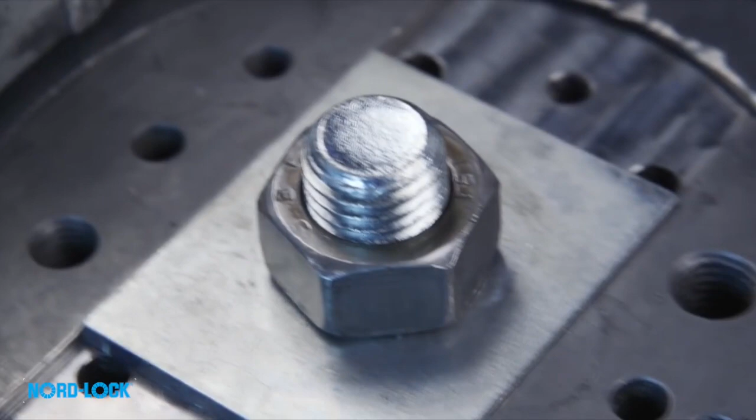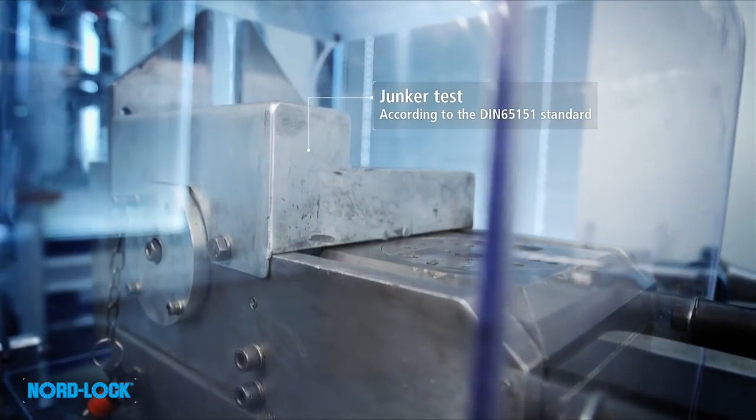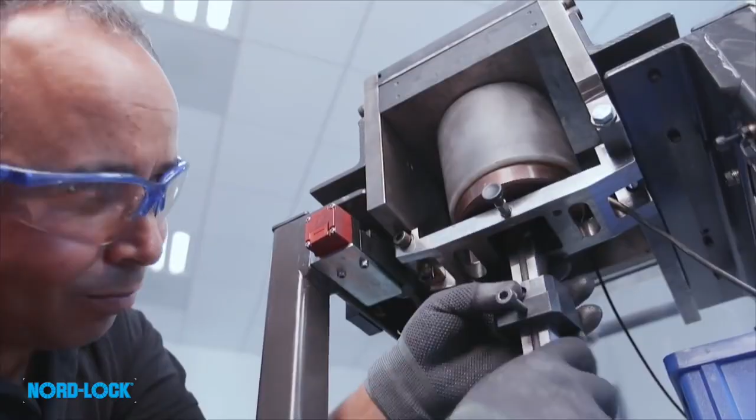Because vibration is everywhere, and vibration can loosen bolted joints. The Junker test is the most severe vibration test for bolted joints, used to compare how different locking methods behave under transverse vibrations underneath the bolt head, while continuously measuring the clamp load. Clamp load is vital, because when lost, the bolt is unable to withstand the working load.

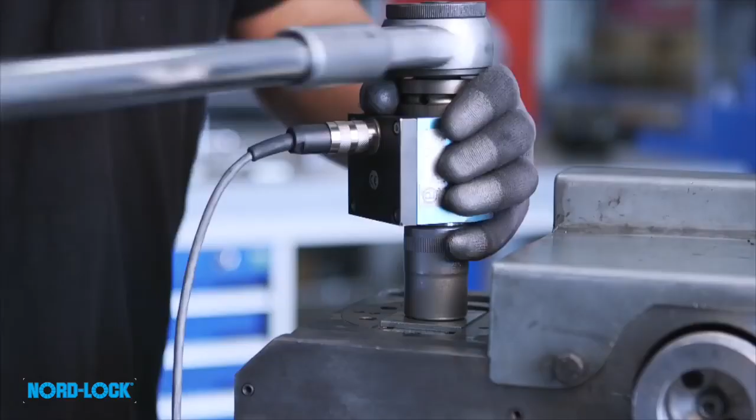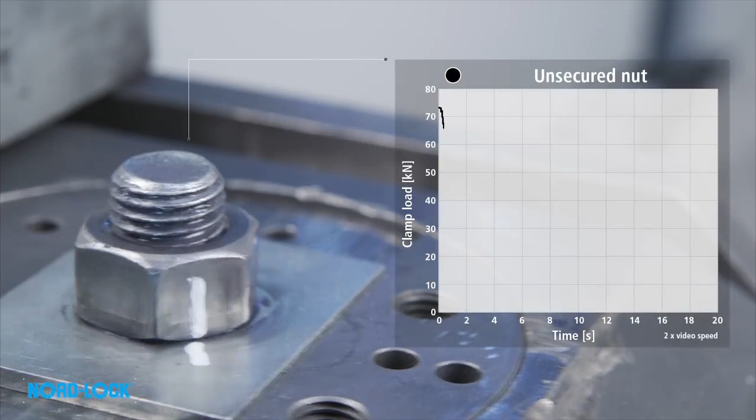We lubricate and assemble an unsecured bolt of size M16. We mark it to easily detect any rotation, and then run a test for 20 seconds. The nut starts to loosen, and the graph shows clearly how the tension drops dramatically within seconds when running the test.

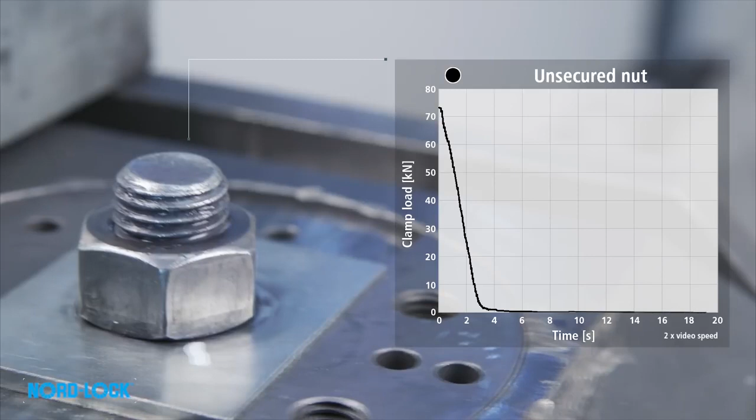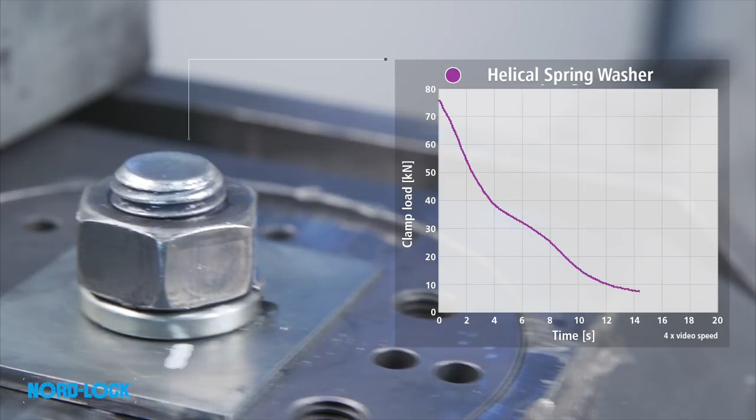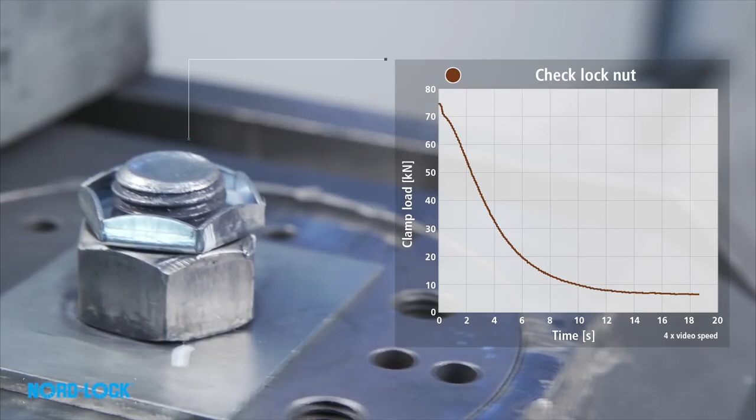We then expose a plain washer. A spring washer. A check lock nut. A nylon insert nut. And a double nut.

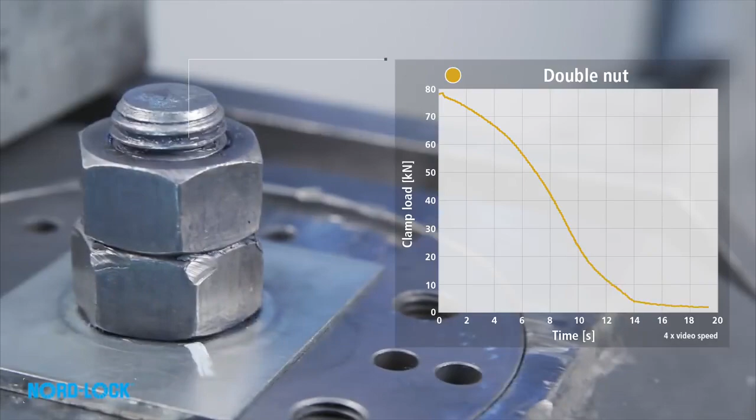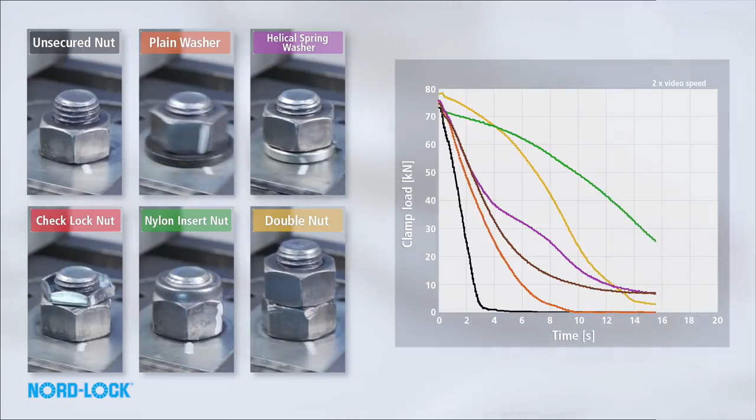All these solutions have in common that they rely on friction to secure the bolted joint. As friction is not a reliable locking method, the bolts will need to be retightened at regular intervals to prevent costly downtime or, potentially, an accident.

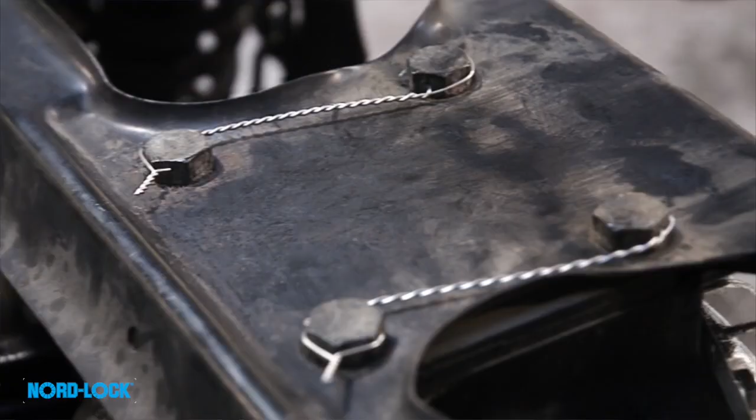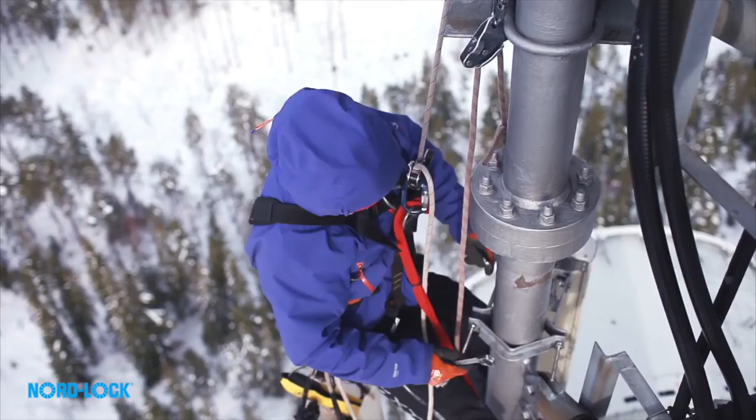Other common solutions, such as tab washer, locking wire and adhesives, are seen as safe. However, repetitive tests show that their performance can vary significantly in maintaining clamp load. These solutions depend heavily on the operator. They often require special tooling, and they are time-consuming.

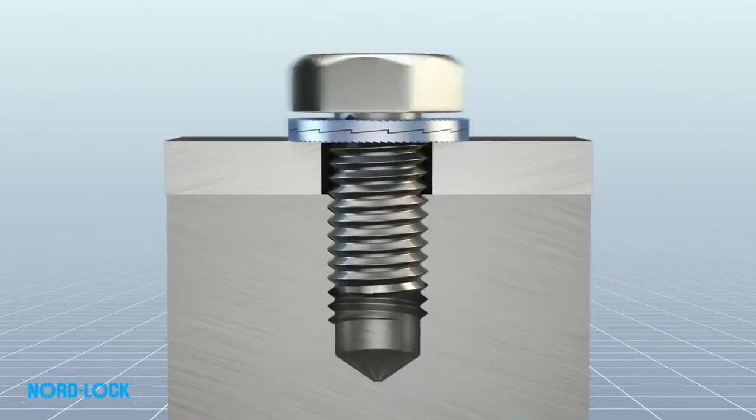Nord-Lock is an innovative solution comprising two washers in a pair. This solution uses an effective principle: geometry. The cam inclination is greater than the pitch of the thread of the bolt. The Nord-Lock washers create a wedge effect underneath the bolt head. This prevents any rotation of the bolt.

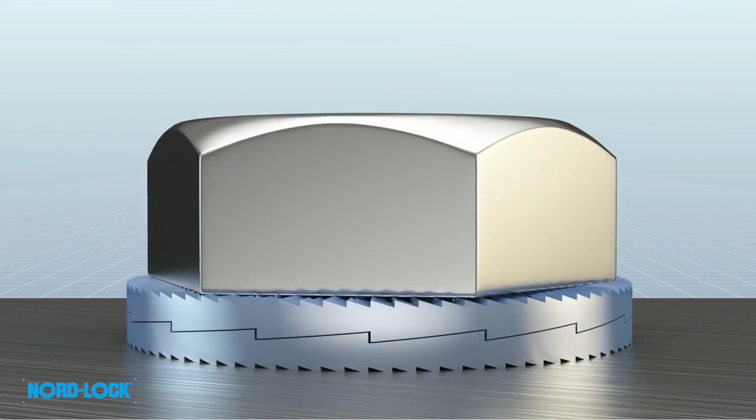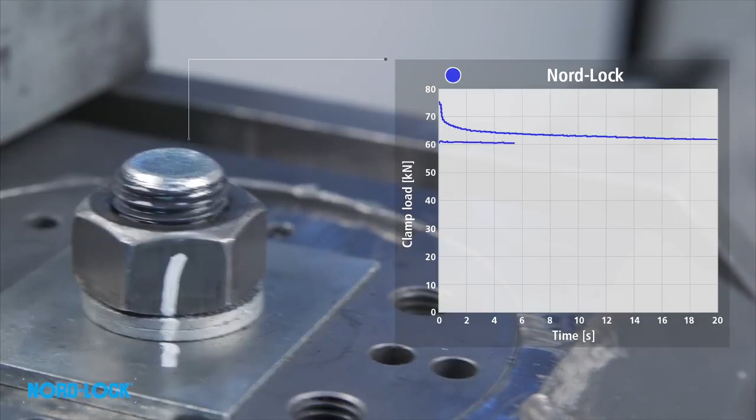After the initial settlements, a high and stable clamp load still remains. A second test continues to show that no unintentional rotation occurs. No retightening will be required. Since the Nord-Lock wedge locking system is not dependent on friction, it is also unaffected by lubrication.

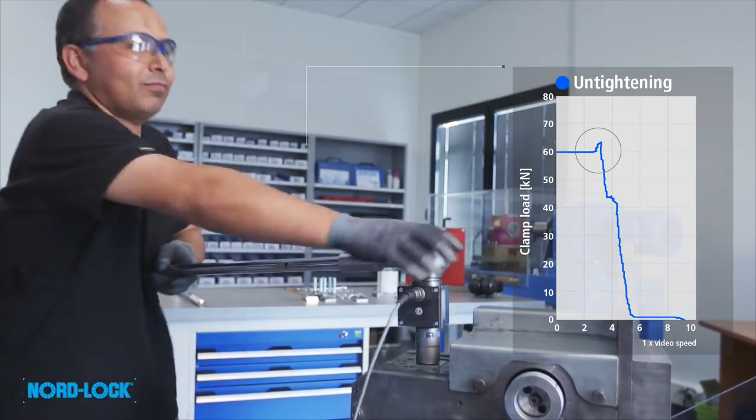Disassembly is simple. We see the top washer override the bottom washer, causing an increase in load during untightening. This is proof of the principle. To properly verify the locking effect, we also check that we have clear impression marks on the nut and on the underlying surface.